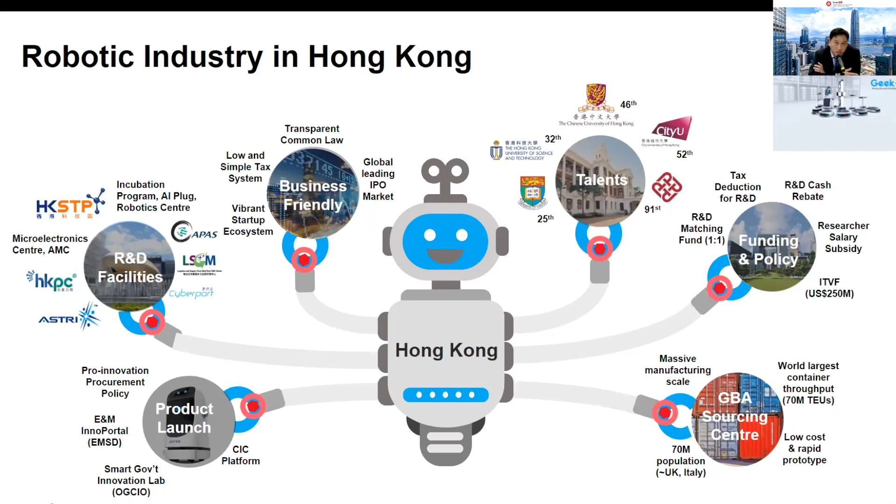We also have a massive number of factories in the GBA area. That's why many companies use Hong Kong as a base and do their manufacturing in the GBA, because it's very close to Hong Kong. That is the advantage of Hong Kong.

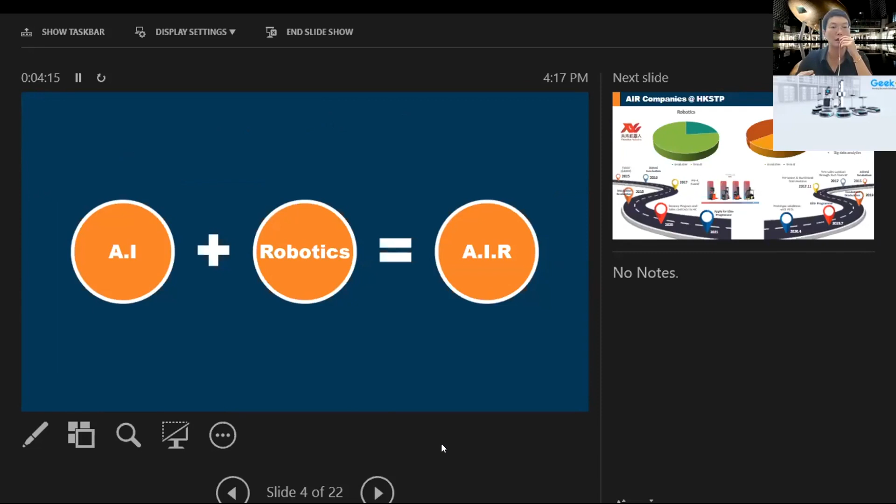So for my own area, which is AIR, an integration of artificial intelligence and robotics - that's why we call it AIR - here is a very quick overview of the existing landscape in Science Park.

In robotics, most of the companies are already in the tenant stage, meaning they are at least SME companies or even bigger. About 20% of them are in the startup stage, so most of them are recruiting or right now in the incubation program.

But for the AI side, you can see another kind of phenomenon. Actually, most of the AI companies right now are still in the startup stage, so they are now in the incubation program, and only a few of them are already more mature and joining the tenancy program. Right now you can see two examples of our successful companies.

The right hand side is a company working on AI, mainly in speech recognition, NLP, and similar areas. They joined the incubation program in 2015, and after two years they got their first sales contract with the support of Science Park. Later on, they got a very good investor, Horizon, offering them pre-Series A investment, and this company graduated in 2018.

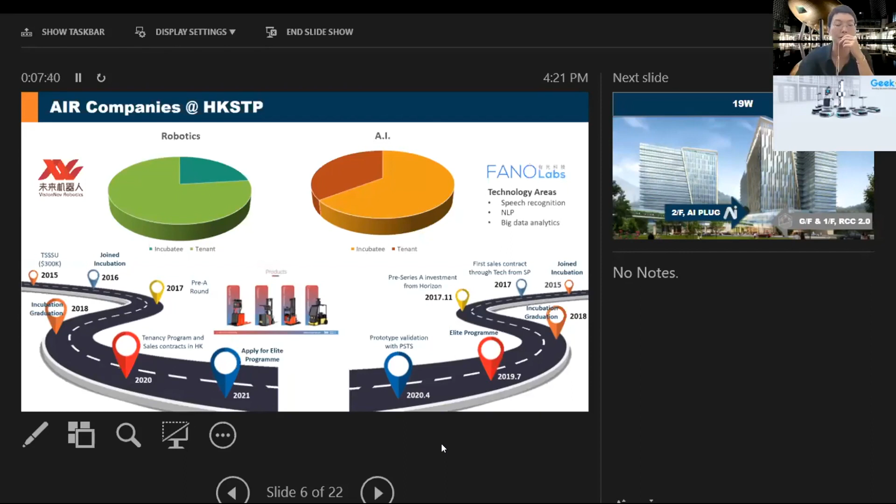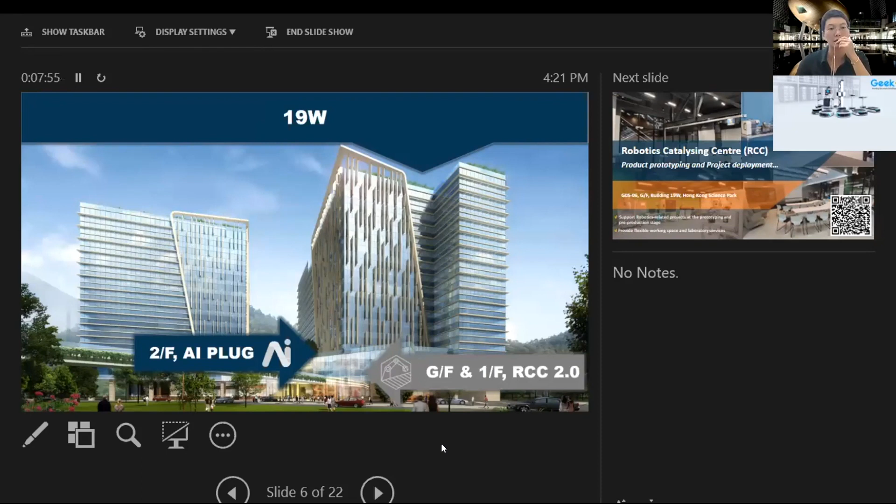Talking about the facilities supporting AI and robotics development, we have two physical centers already set up. One is for AI, which we call the AI Plug, and the other is the RCC, the full name being the Robotics Catalyzing Center.

The RCC offers two critical components for robotics companies. The first is the prototyping service, and the second is the space. This is not just a common office space—it's actually a lab space that allows people to set up robotic solutions inside.

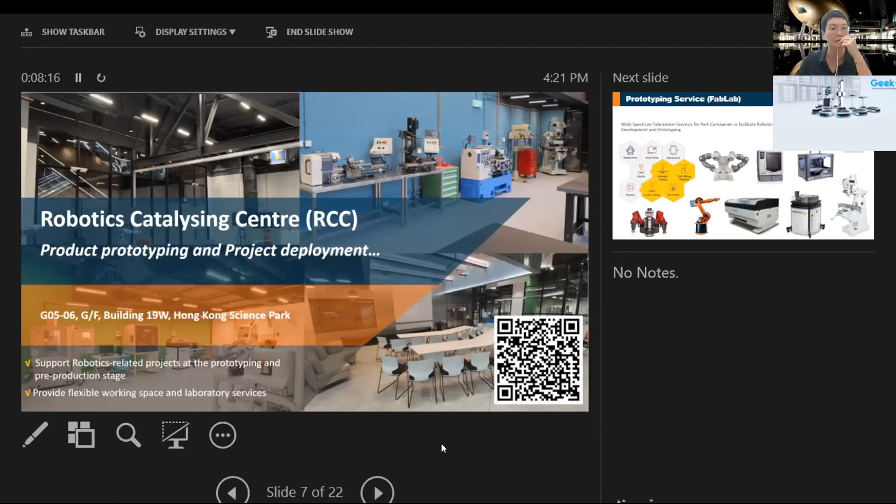For the prototyping service, we hope to offer the most practical support to robotics companies. We have robots on site that you can rent for your own purpose, as well as 3D printing service, laser cutting, and waterjet cutting. All of these are quite practical for companies really working in robotics.

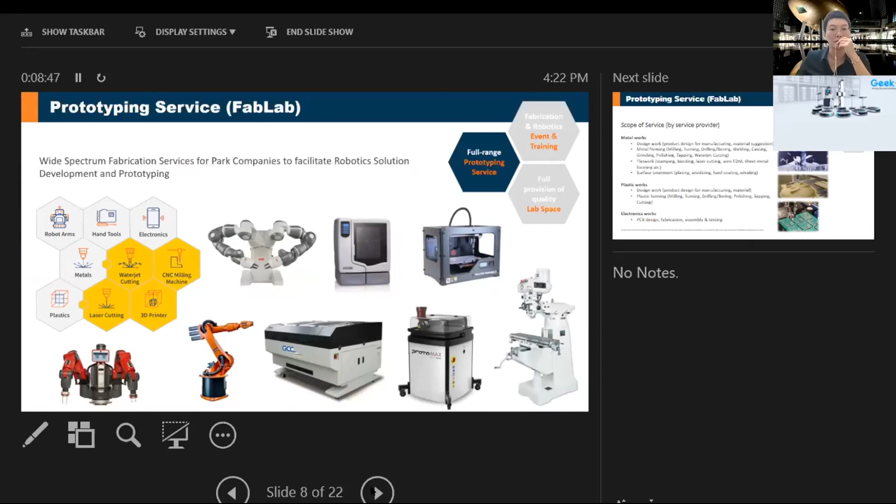For some hardware development, you usually need support from other service providers, so we've offered support for this kind of prototyping service as well. They can help you do metal work, plastic work, and electronic prototyping, so you don't have to worry about all this. Once you're situated at Science Park, even things not really related to hardcore R&D, we offer such services so that you don't have to spend time on it.

Talking about the lab space, all the lab spaces have high flexibility. You don't have to rent the space for years. Even if you just want a space for one project, the shortest rental time is just 1 month, meaning you can set up the whole production line for your client, and when they accept the design and deliverables, you can just move out.

Within the lab space, we already have certain provisions, like high power supply, chemical drainage, and compressors, something like that. So you don't have to worry about the renovation as well.

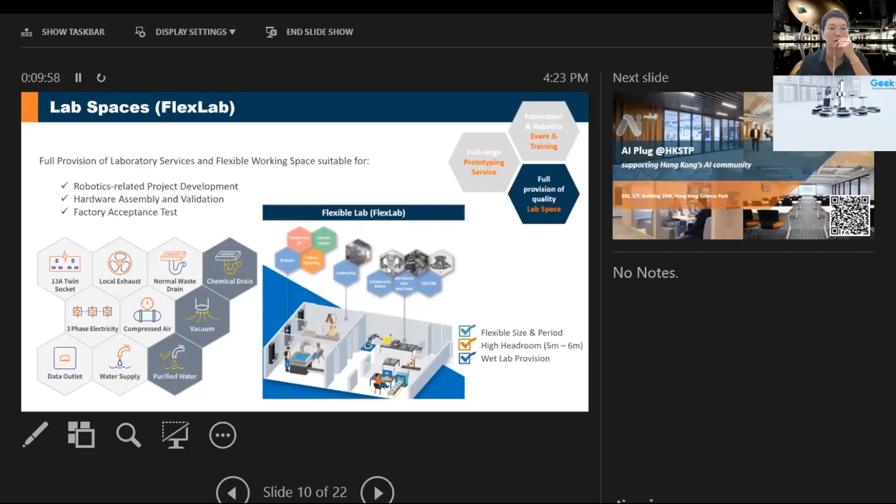The RCC is mainly for robotics, and the second one, AI Plug, is for AI companies. This one operates on a membership mechanism—any company with AI R&D elements can join AI Plug as a member. What we offer is free usage of the AI Plug facilities, like the working cabin and meeting rooms, which are mostly used by AI companies.

Additionally, we have a good deal with several cloud service providers like AWS, Microsoft, Huawei, Alibaba, and Google Cloud. They all have special credit offers for us, the AI Plug members. If you are an AI Plug member together as a Science Park company or incubatee, you may also enjoy the matching fund we offer, which is up to 48,000 per year. Simply speaking, you pay a 3,000 membership fee every year, and then you can seek a 48,000 return when subscribing to the cloud services.

These are benefits for AI Plug members. More practically, if you need technical support from different service providers like cloud service providers or hardware service providers, it's not easy for startup companies. But if you are an AI Plug member, we can help you connect directly with these providers, because they can help with POC stages, offer technical trainings, or even business matching opportunities for our AI Plug members. This is what we call the tech shop.

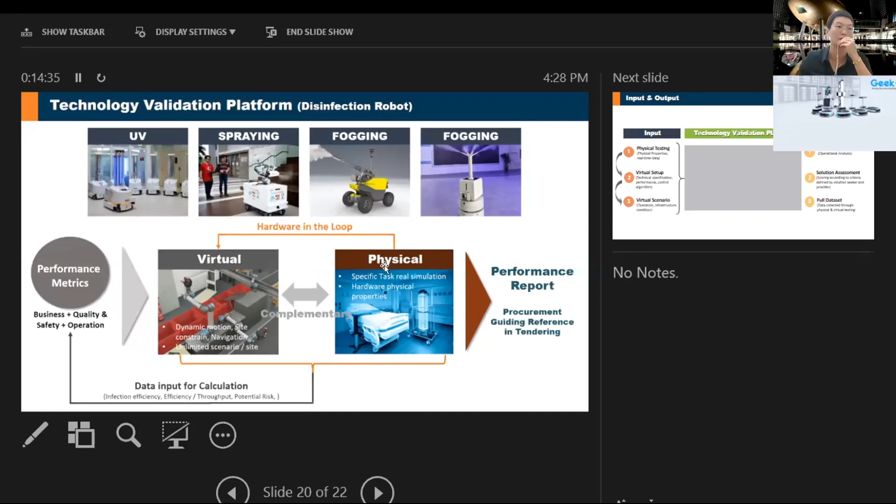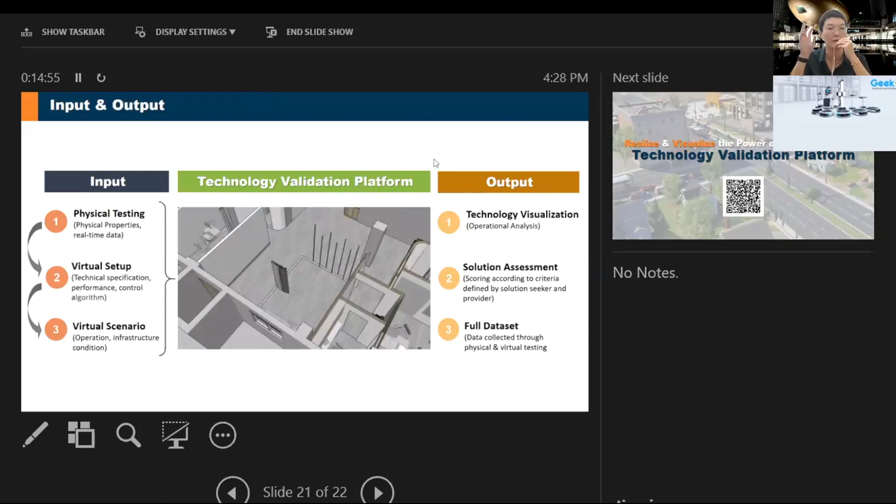We believe that having this Technology Validation Platform will help the solution seeker identify the most suitable solutions they are looking for. Within the platform, there is no limitation for application scenarios, and for you, you may also load some of the assessment for your own solutions.

So this is my presentation today. In conclusion, through the Technology Validation Platform, we hope to help everyone realize and visualize the power of technologies. If you have any further questions, you can scan the QR code, and this is my contact. Thanks a lot.

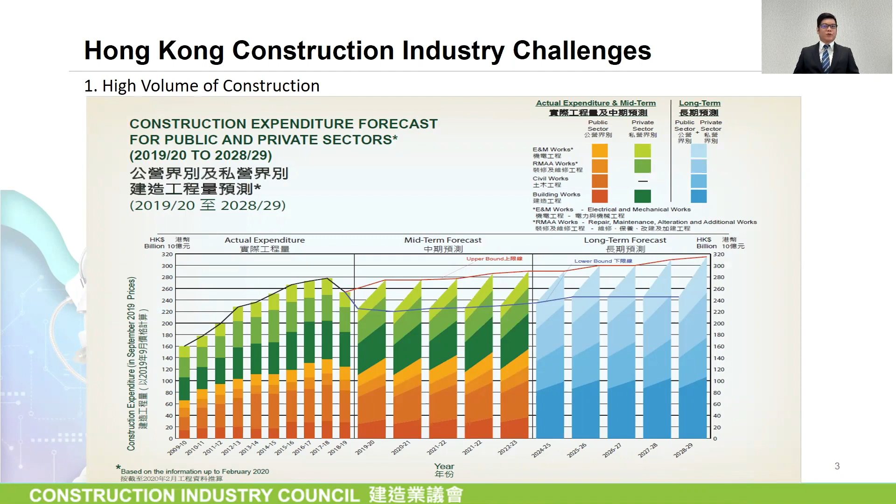According to the 2020 International Construction Cost published by the consultancy firm Arcadis, Hong Kong still ranks very high in construction costs, just behind London and New York.

For the safety concerns, although both accident and fatality rates are showing a downtrend, there are still ways to further improve the safety performance of the industry. For example, application of construction robots for some high-risk tasks can definitely make the works safer and hopefully further lower the accident and fatality rate.

According to our worker registration records, the average age of our workforce is nearly 50, and over 53% of our skilled workers are aged 50 or above. This figure is indeed very alarming and is affecting our productivity.

In view of the above, the Development Bureau of Hong Kong SAR government has led the industry to implement Construction 2.0 for promoting its sustainable development by advocating innovation, professionalism, and revitalization. The development of an industry culture that embraces change, innovation, and new technologies to drive forward productivity, efficiency, and enhance project delivery outcomes. We need more construction robots to help achieve this.

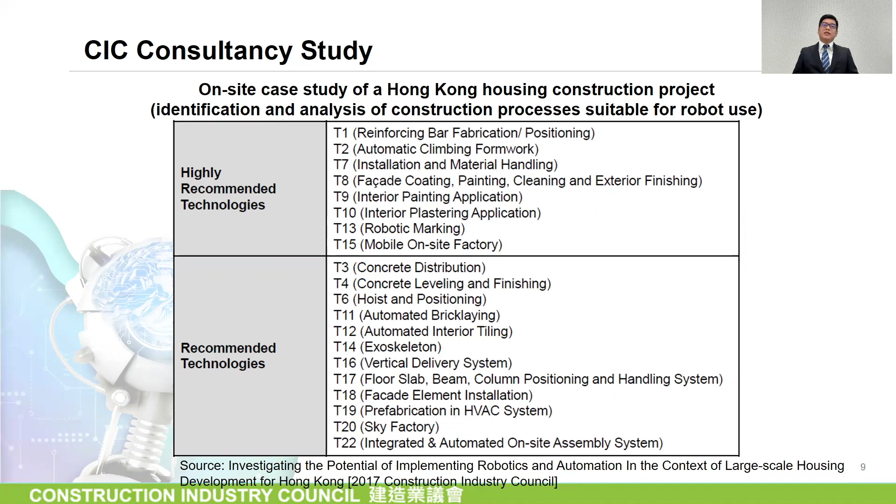In the study, a survey result showed that in Hong Kong, construction robotics and automation are overall approved by the local professionals and stakeholders. The highly recommended technologies are reinforcing bar fabrication, positioning, automatic climbing formwork, installation, and material handling. If you are interested in the report, you can refer to it on our CIC website.

Now I will show some robotics applications in Hong Kong. The service robot is a custom-built robot system for repairing gas service pipes at the external wall. It's equipped with cameras and different advanced sensors, such that the user can monitor and remotely control the robot at the ground station. It improves work quality and safety.

Adaptive robotic welder also reforms the traditional way of welding. With its adaptive robot control, the robot can be set up within 2 to 5 minutes. The operator can easily perform the welding function in a safer manner. The robot can also work with BIM, big data, and 5G technologies, bringing added value to the construction works.

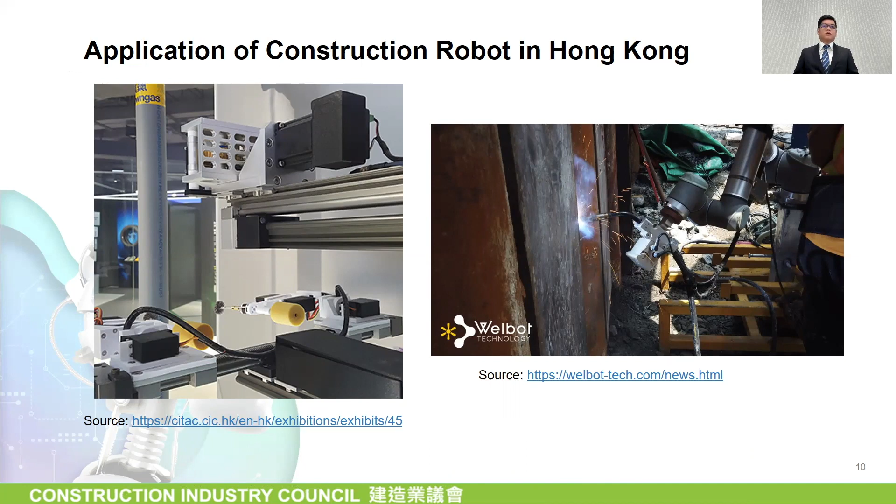The intelligent robotic system was initiated by the Highways Department and successfully built by the Highways Department and the Hong Kong Productivity Council. The system possesses full cognitive abilities to understand its surroundings and uses automated robot arms to place and collect traffic cones on public roads. It enhances safety protection for carrying out road works on public roads.

The drilling robots drill holes at the ceiling automatically. Under the control of just one worker, the worker has to enter the perimeter of the workplace via a BIM model, set the first drilling hole, and the robot can do the rest. Compared with the traditional drilling method, the robot saves about 70% of the time needed for a job and improves safety by eliminating the need to work at heights.

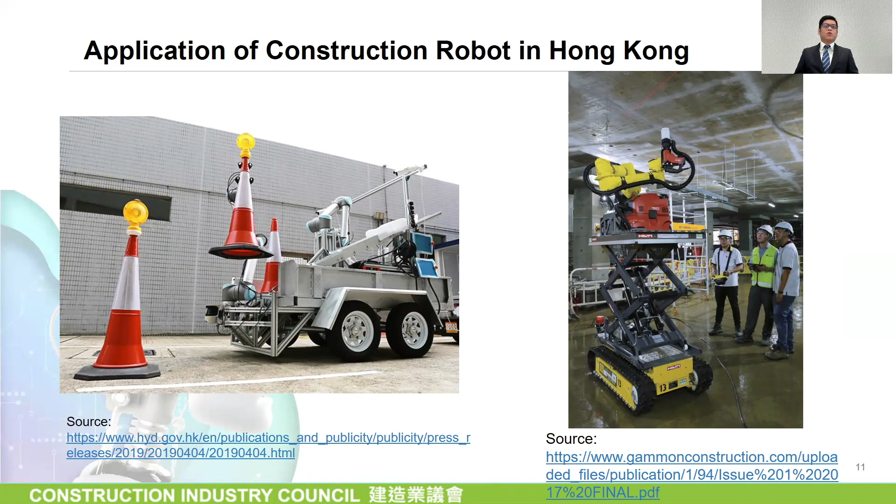The CIC believes research and innovations are of great importance to the sustainable development of the construction industry. Hence, CIC is committed to working closely with industry stakeholders to drive innovation and initiate practical research outcomes.

The CIC Research and Technology Development Fund is set up to provide financial support for research projects which can benefit the construction industry through practical application of the research outcome. Construction robots are one of the research agendas we are looking for. We hope to support researchers and innovators to develop construction robots and conduct trials.

European companies can apply for our R&D fund via subsidiaries established in Hong Kong or by working with partners in Hong Kong. Besides the R&D fund, there is another technology fund called CITF, more focused on product implementation to encourage wider adoption of innovative construction methods and new technologies.

I introduce Raymond from our CITF team to brief you on the fund. Raymond, please.

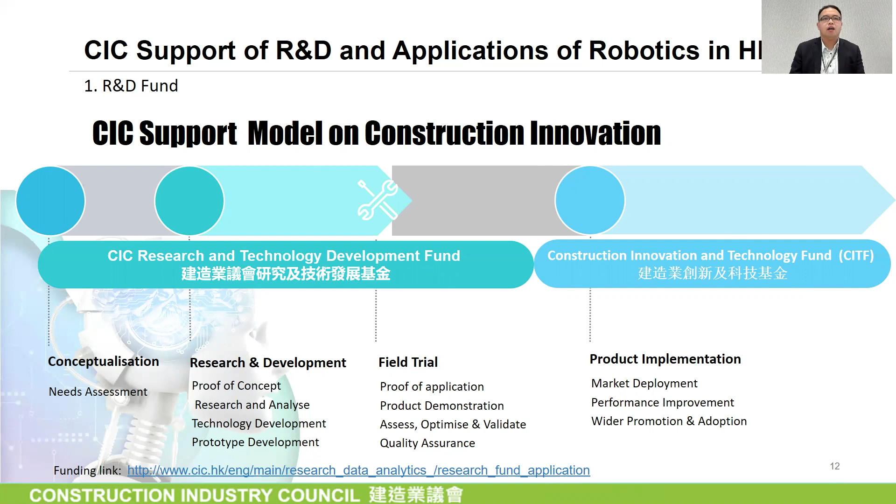My name is Raymond, representative of the CITF Secretariat. The CITF has an approved allocation of 1 billion Hong Kong dollars. It was established by the government of HKSAR in October 2018, with CIC as the implementation partner. The CITF encourages technology adoption in automation, industrialization, and digitization. We have two categories: the technology adoption stream and the manpower development stream.

We will elaborate more on the advanced construction technologies (ACT) and industrialized process under the technology adoption stream today. There are mainly three types of enterprises eligible to apply for the CITF: levy-paying contractors, registered specialist trade contractors and registered subcontractors, and consultants on the list maintained by the government and professional bodies.

We have two modes of funding under the ACT. The first is co-funding with 70% grant from the CITF, and the second is co-funding with 50% grant from CITF for rental of equipment. The funding ceiling is 800,000 Hong Kong dollars per technology. Within this ceiling, the ceiling for rental is 200,000 Hong Kong dollars per technology, and the rental period is no more than 6 months. The cumulative ceiling for rental is 500,000 Hong Kong dollars per applicant or company.

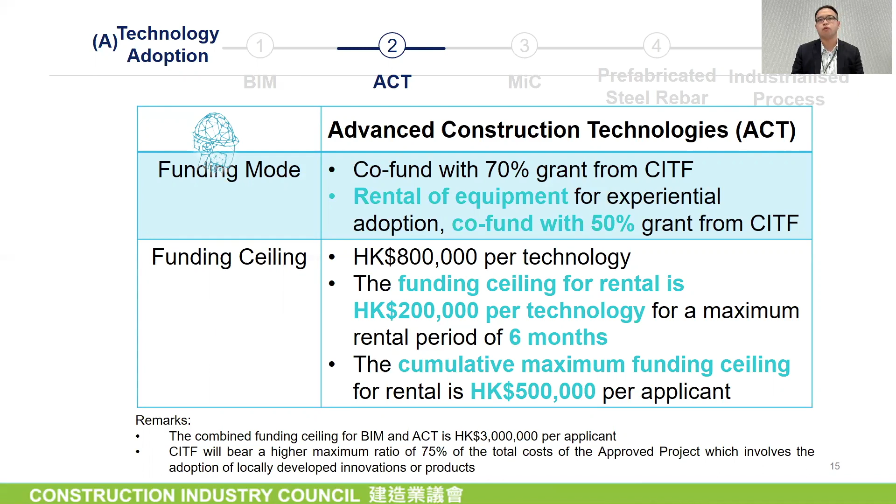Some applicants ask how they could locate a robotic technology that might suit their projects. You could either look for those technologies via your own service providers, or browse the pre-approved technology list on the CITF website. Those technologies listed in our pre-approved list were technically approved by the CITF vetting committees. If you are eligible to apply for CITF and choose an item from our pre-approved list, we could notify you of the application result within 30 calendar days upon receiving complete information.

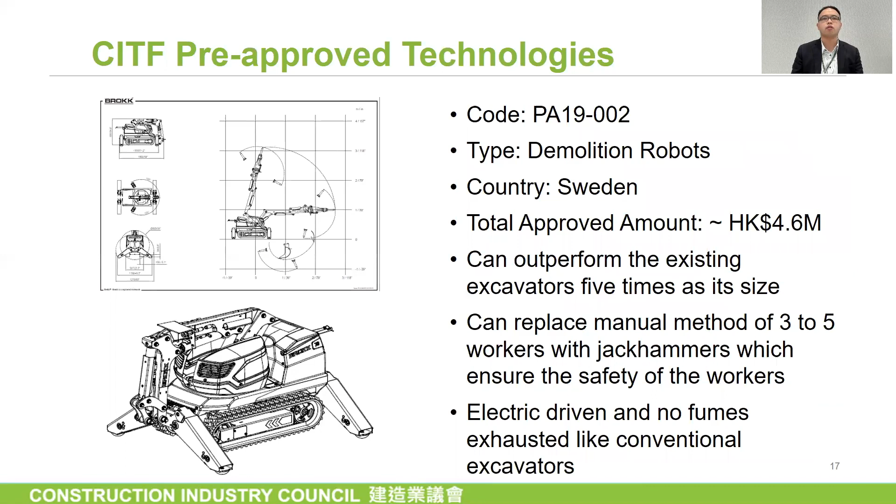Taking one of the pre-approved robotic technologies as an example, we have so far approved around 4.6 million Hong Kong dollars to eligible applicants adopting this technology in their construction projects in Hong Kong. We also provide funding support to industrialized process robotic welding. The funding ceiling is 800,000 Hong Kong dollars per applicant, and the mode is co-funded with a 15% grant from the processing fee involved.

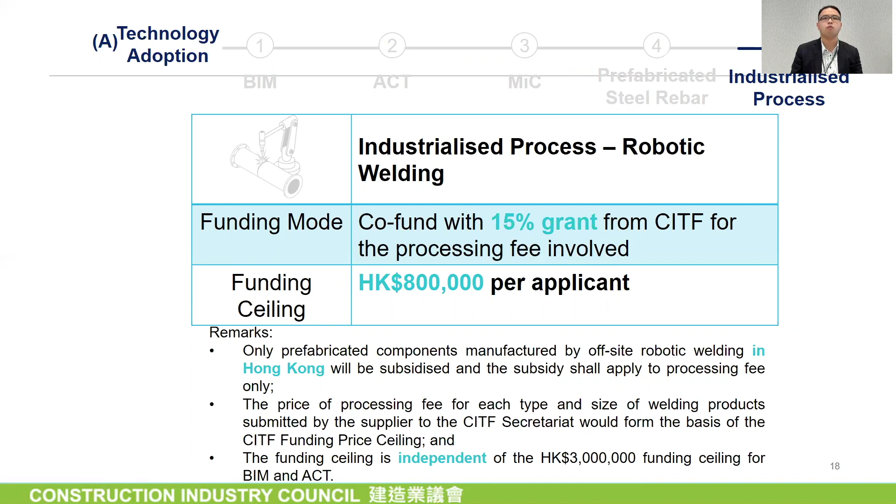The application process of CITF is mainly via the CITF application e-portal. Therefore, you have to create an account at the CITF website if you would like to apply for CITF. It would normally take us 60 calendar days to process non-pre-approved applications, and 30 calendar days for pre-approved applications. Thank you for your kind attention, that's the end of my section. I will pass it back to Terry.

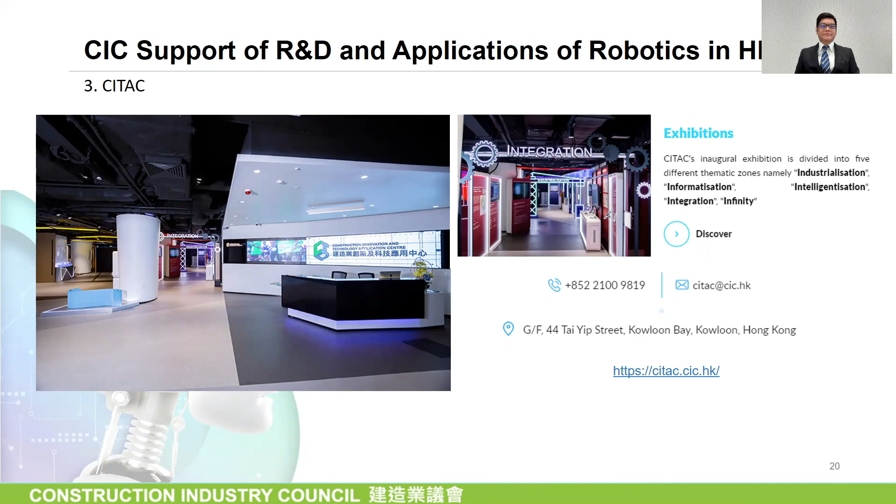Last but not least, we are developing a construction robot certification scheme applicable to all construction trades, with specific requirements for 3 key trades: welding, painting, and plastering. The objectives are to stimulate and elevate confidence in the use of construction robotics, and thus stimulate demand and supply of robots for the Hong Kong construction industry, to benchmark the performance and reliability of construction robots used on construction sites, and to uphold industry-wide standards in terms of functionality, productivity, quality, safety, and sustainability.

We have commissioned a consultant to carry out a study for establishing this scheme for us. The scheme is expected to launch in the second quarter of 2021. That's all for my presentation today. Thank you very much.

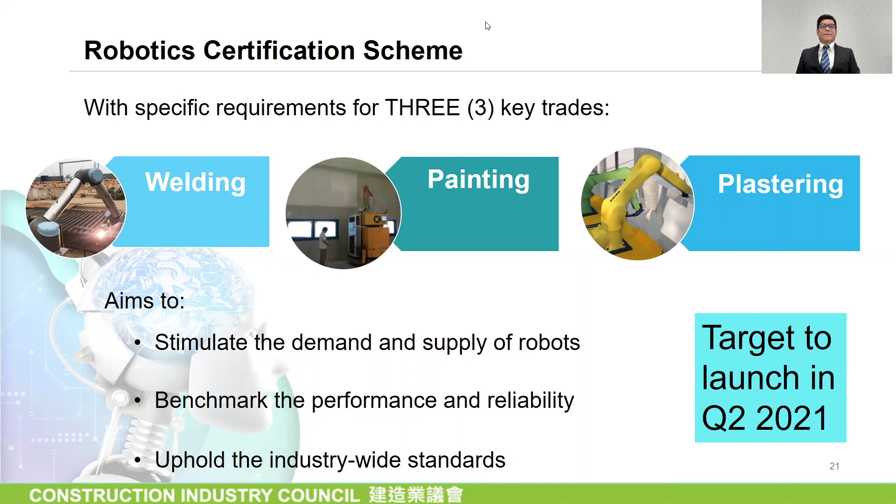So someone want to talk, continue to talk. Hello, Jonathan. I can see you over there with your robotics sitting next to you. So I do, it's doing a massage for you, right? So I hand over to you. Thank you, Jonathan. Perfect, thank you.

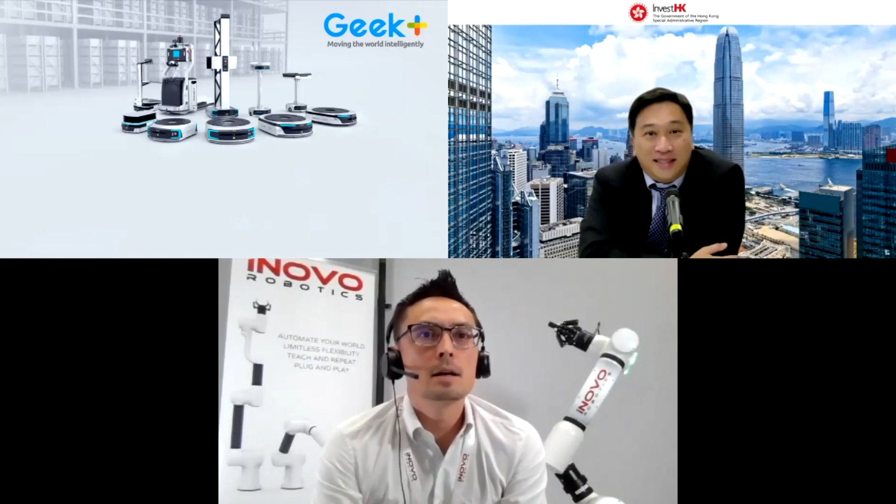Let me just prepare my slides. Great, firstly welcome everybody, and thank you very much Andy and the team at Invest Hong Kong for the warm invitation and introductions. My name is Jonathan Chung, as Andy said, and I am the co-founder of Inovo Robotics. And as you can see, I've brought a robot with me today.

We started Inovo Robotics in 2016. We are a collaborative robot manufacturer, and we specialize in making not only industrial robots, but collaborative robots for small to medium businesses, for batch manufacturing companies, but also a number of different verticals, such as agritech, food and beverage, batch and small scale manufacturing, as well as the education market. So a number of different verticals, and what we do is we have a unique set of selling points which allows us to enter those markets and be successful with those features, which I'll go on to in a moment.

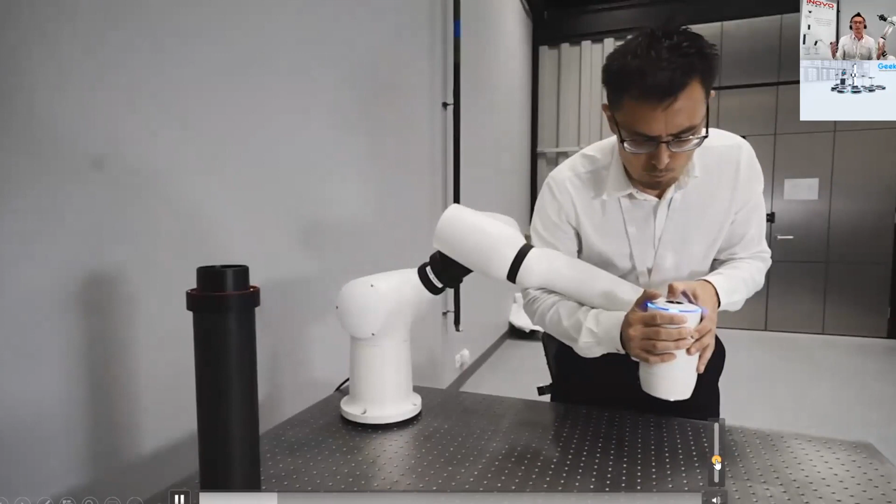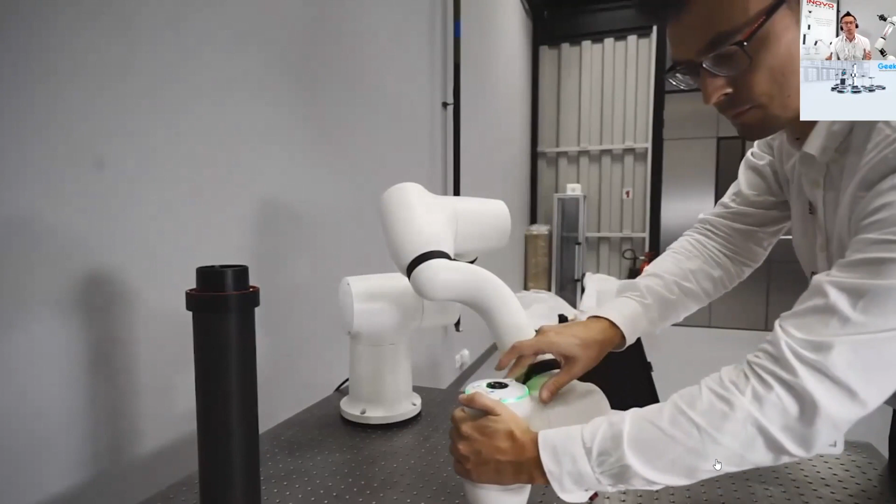So what we have is a really portable, flexible robotic system. This is a plug and play, modular, easy to program, highly flexible robotic platform. What this platform does, as this video is showing, is offer a really easy way to configure, use, and program, and quickly automate your everyday needs in a safe way.

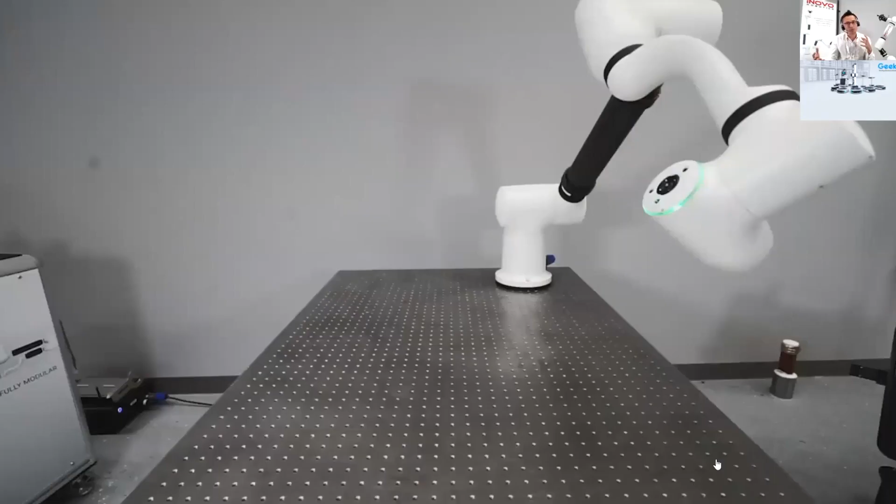And so what I'm doing now is I change the length of the robot. Suddenly you go from a very small, high payload robot, which is working in a very confined space and is easy to program, to a very long reach robot for hard to reach areas, for moving items at greater distance. That highlights loosely what our first real target unique selling point is.

So what you see here is 3 robots, but actually this is all one robot. We create a 3-in-1 robot solution. This enables our users and customers to not have to worry about picking the right length or the right payload, or worry about getting it wrong and having that robot only do one thing for its entire life, and then afterwards be inflexible to change its application in the future.

And secondly, what we are really aiming to do is make really easy to use robots. We bring a different level of flexibility and ease of use that you really don't see elsewhere in the market. And thirdly is our price point. We aim to democratize robots, meaning to enable as many people to have access to automation, not just the big companies who have the budgets for large robots - they don't necessarily need to be the only ones who benefit from automation.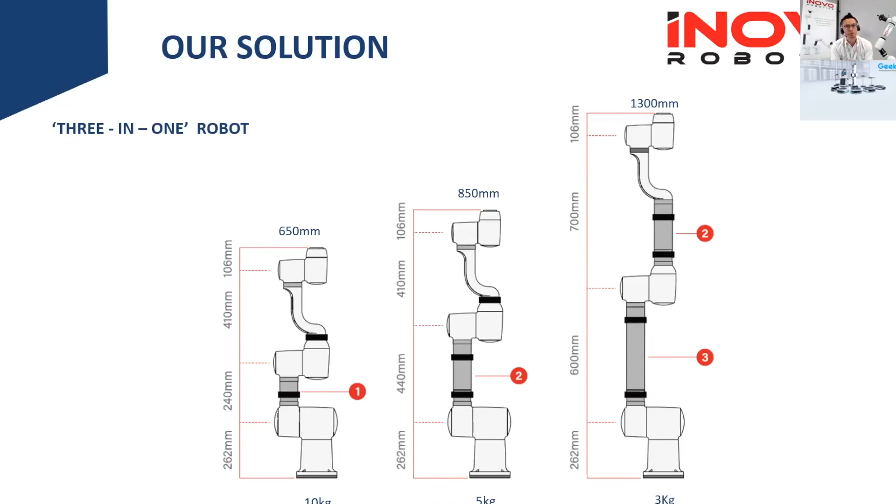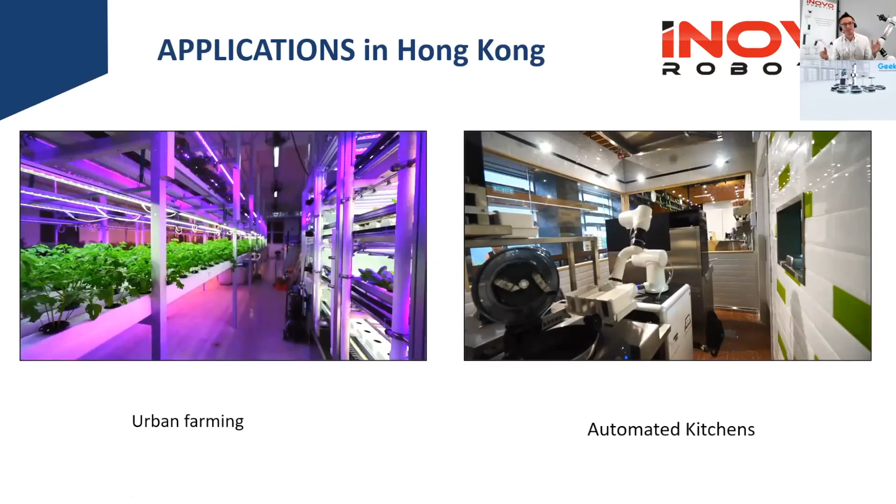So here are some applications that we have going on in Hong Kong. On the right-hand side, we have our robot in one of the verticals I mentioned earlier - this is in a smart restaurant, where we move raw ingredients into the cooking area. This is very good for them because it enables them to take the person outside of the kitchen. The kitchen, or the person, is the biggest cause of contamination, virus, dirt, health and hygiene risks inside the cooking area.

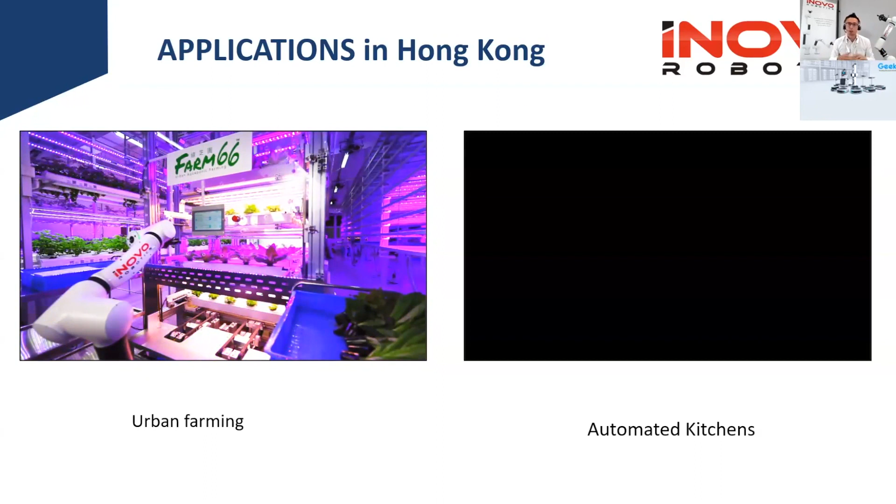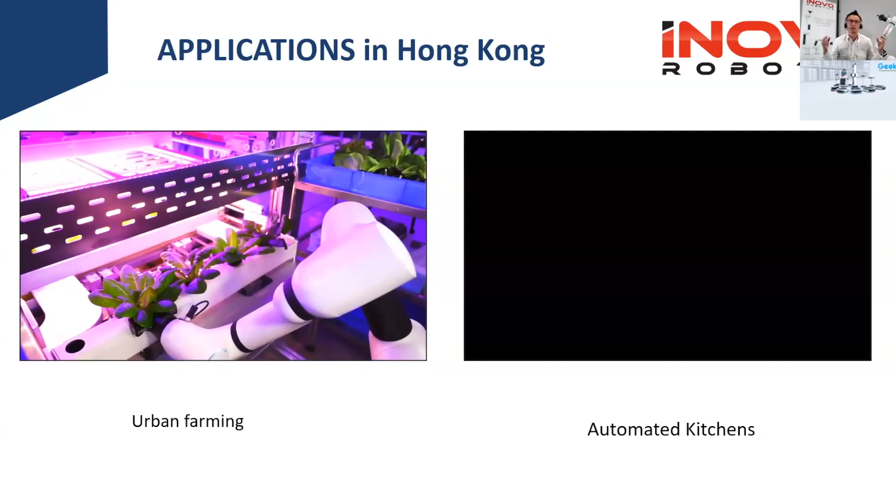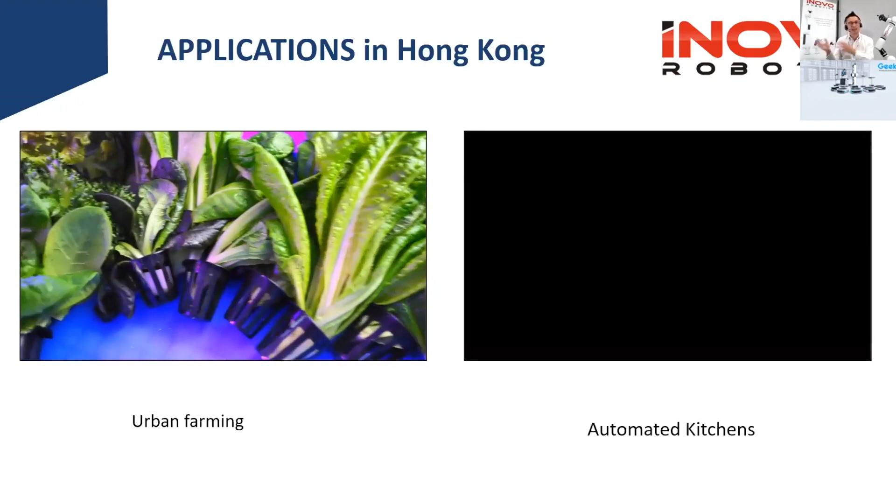And on the left-hand side is a collaboration we're having with Farm 66, another Hong Kong startup within the Hong Kong Science Park ecosystem. They are experts in vertical farming - indoor farming in a super hygienic, clean way. We help accelerate their activity by simply bringing in our automation systems and automating equipment. So that's one of the areas.

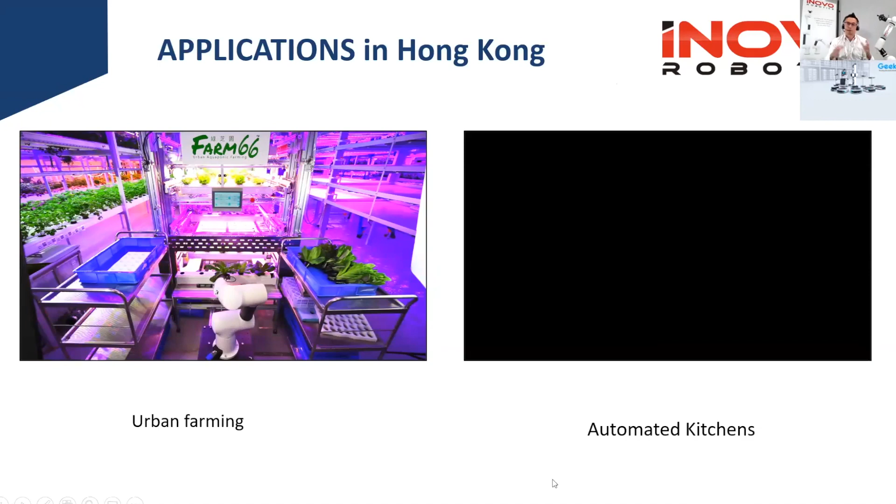So again, it's a similar theme with removing people away from food products to increase the level of health and hygiene and decrease the level of contaminant. This is an area that we're really excited about because it's a real fun area.

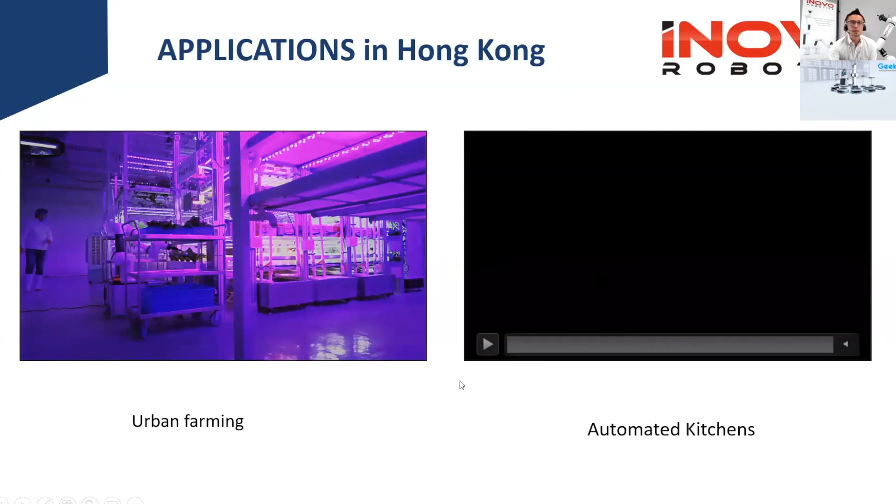Going on to some other applications we're working with within Hong Kong and different areas - as I mentioned, food and beverage, urban farming, also lots of assembly work with companies whose head offices are in Hong Kong but their factories are in the Greater Bay Area. As labor rates are increasing, they're looking to increase fast and flexible automation, and also lots of different areas within spray painting, testing, and edutech.

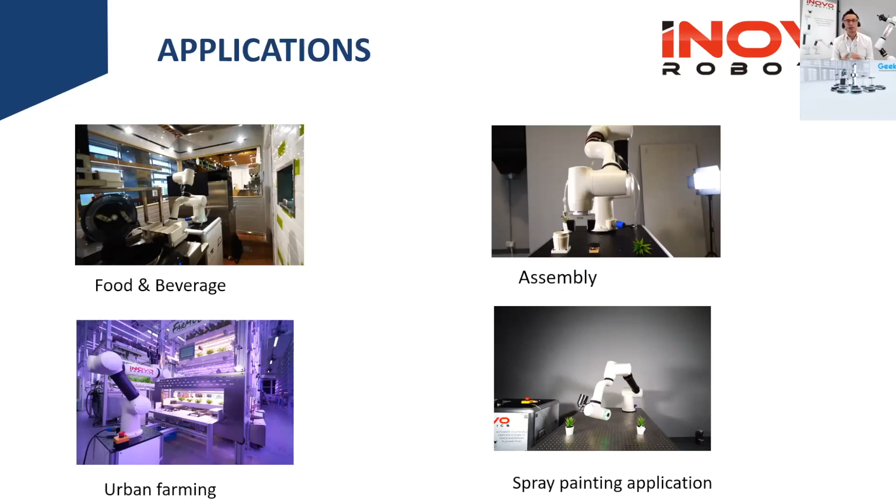But really, just to touch on what we feel is the future of automation and the reindustrialization of big cities such as Hong Kong - in robotics, we have Industry 4.0, which people often use and understand well, and that image of what Industry 4.0 is: smart factories, peopleless factories.

And what we found in the last 6 months with COVID-19 is an increase in social distancing within the workplace, reducing the level of contamination. There's been a huge increase in the need for automation, AI, and robotics, and reducing the risk that businesses have if a pandemic happens in the future - can their businesses continue to operate, what tools allow partial operation, and all those kinds of things have meant that this vision of smart connected machinery is getting closer and closer. That's meant that the market in Hong Kong and the Greater Bay Area, as GDP increases and minimum wage levels increase, is becoming a much more important factor.

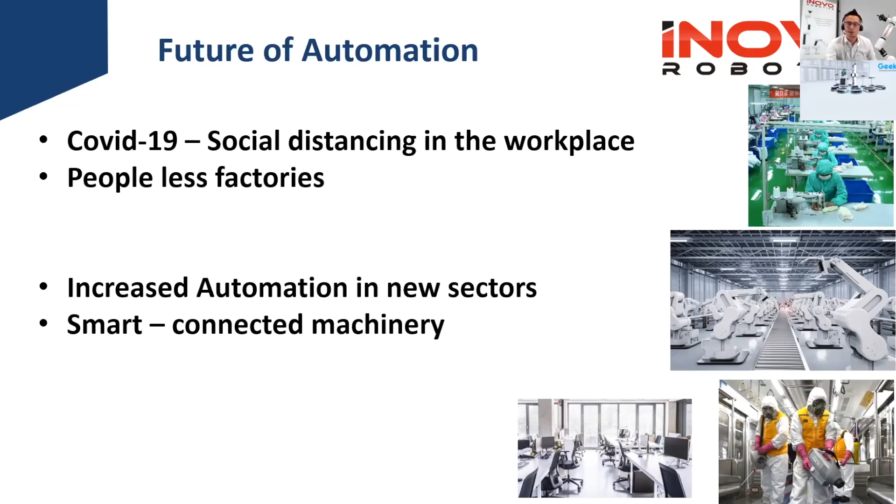So the area for us in Hong Kong, the Greater Bay region, is very positive, and we're very happy with our business growth as it is. And that really brings to the end my presentation.

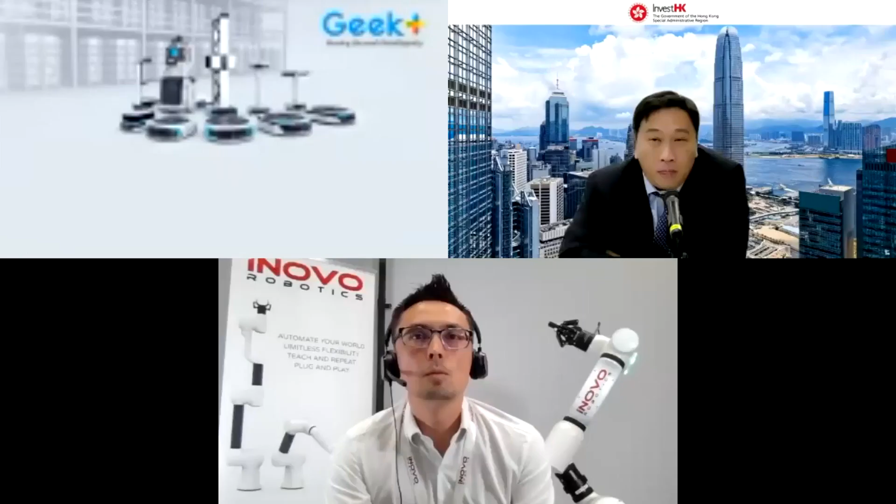Thank you very much, Jonathan, very interesting video and talk. There's a couple of questions already in the Q&A section for you, so we will leave it at the end of the section. The next speaker is Mr. Fong, who will talk about Geek+ and how to use Hong Kong to go global. Shall I pass it on to Mr. Fong? Thank you for joining us today. Let me hand over to you. I know you have a very fantastic video prepared for this talk, so I hand over to you. Thank you, Mr. Fong. Okay, all right. Okay, cool. Okay, let me share the screen.

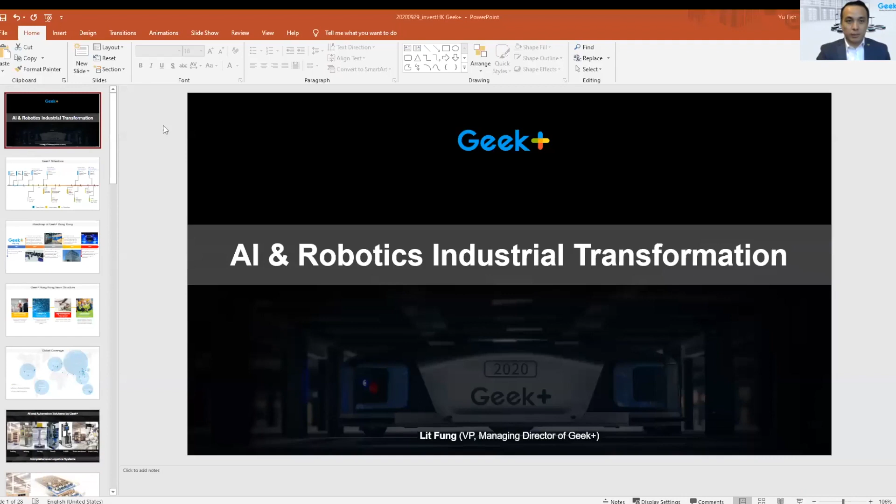Okay, thank you, Andy, and the team of Invest Hong Kong for the time in this webinar. My name is Lit Fung, VP and Managing Director of Geek+. We are in the AI and robotic industry.

Let me introduce our company background. We were founded in 2015 in Beijing, China, and in the first year we got a 10 million RMB angel round funding, which supported our growth and R&D product. We kept getting different series of funding. Last year we closed our C1 series funding with $200 million US, which is very good funding for us and also the biggest value in our industry. We broke the record already, and this year we also have another new round coming. Probably we will close another round within this year.

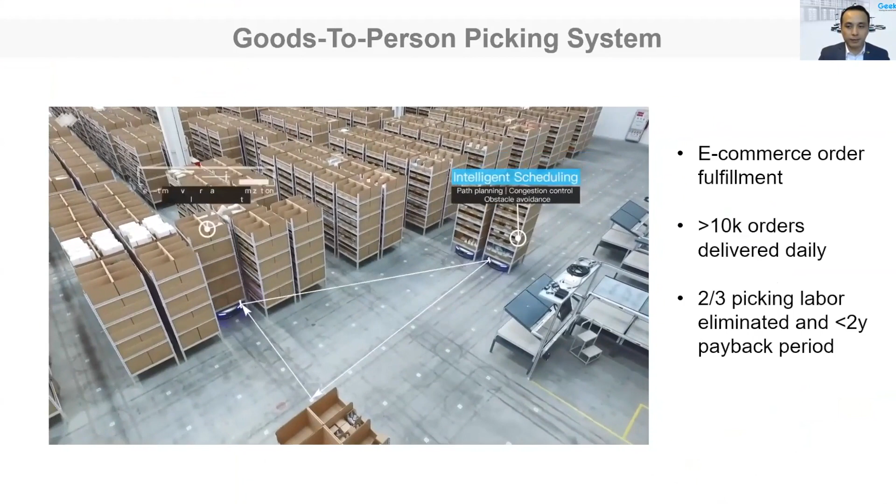You can see this is a kind of robot that goes under the shelf and then brings the shelf to the operator to do the picking. This is a quite familiar system, we call it picking system. And this is the robot we sold the most quantity of in the world. The robot can help the operators with labor saving, up to 60% labor cost saving. So the customer can enjoy a very good return on investment.

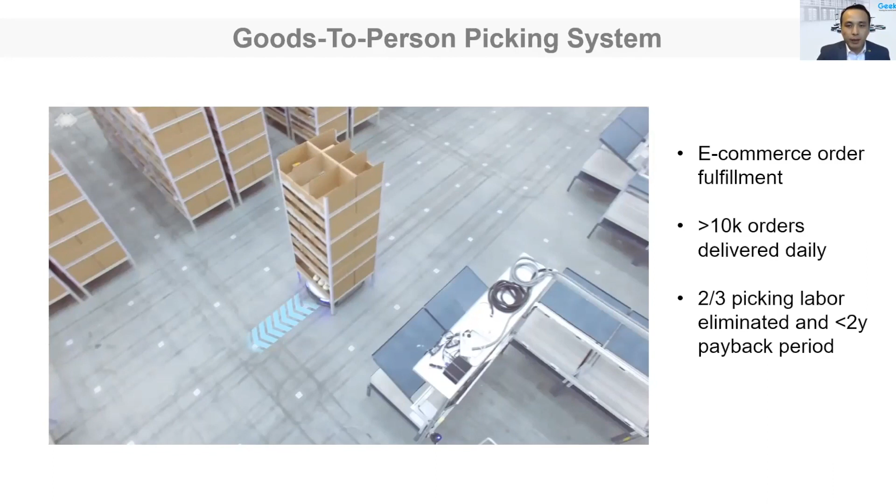And then here's a case where we worked with Decathlon. You know, Decathlon is a very fast growth company, and we're happy to work with them. We grow together with Decathlon.

We've already deployed almost 10 sites already, six sites in China and another 4 sites in Europe and also Asia. We will probably have 16 site warehouses globally within this year. And then we also plan to work with them on around 35 sites totally in the world over these 2 years.

So this is one of their case videos, and I think it's very interesting for you guys. So let's have a go.

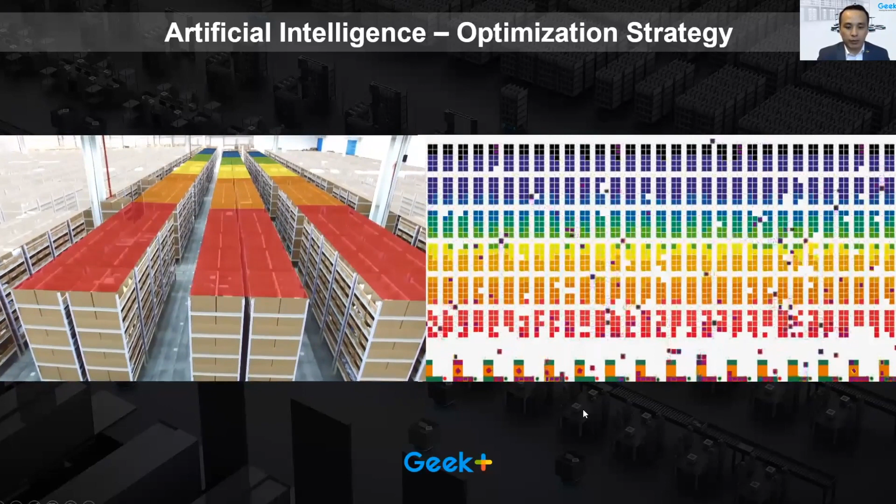And then how we can do the AI - we always claim every product, every service will have AI, but in the robot system it's more easy to understand. We can have some optimization on the solution, you can see there's different colors of the rack or shelf, and we have a heat map to do some scoring so that we can do the shuffling or relocation of all the racks, so that we can keep the most fast moving items closer to the operator, to reduce the traveling distance for the robot as well.

And another type of system that we launched this year, we call it a robot shuttle. This is more applicable for normal shelving with mezzanine floor, or even normal shelving with 5-meter height. The robot can grab the tote to the operator, similar to the previous goods-to-person solution.

And this is one of the videos I can share with you. It's very nice.

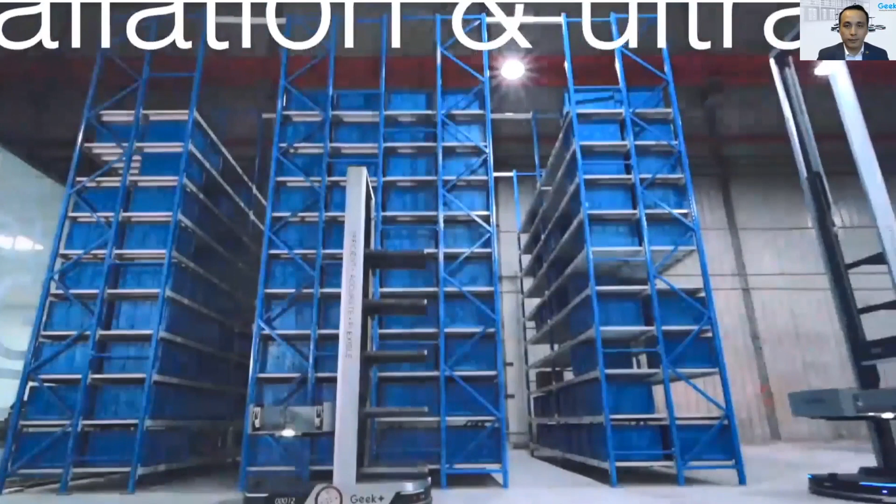I think the most important principle of the robot is no single point of failure, and then you can make use of the robot to utilize your operation.

Another system we have is a new system in the sortation area, the sortation robot sorting system. This is a traditional way that uses the conveyor belt to do sorting, but we are using robots to carry the conveyor belt and carry the tilt tray to do the sorting in different scenarios.

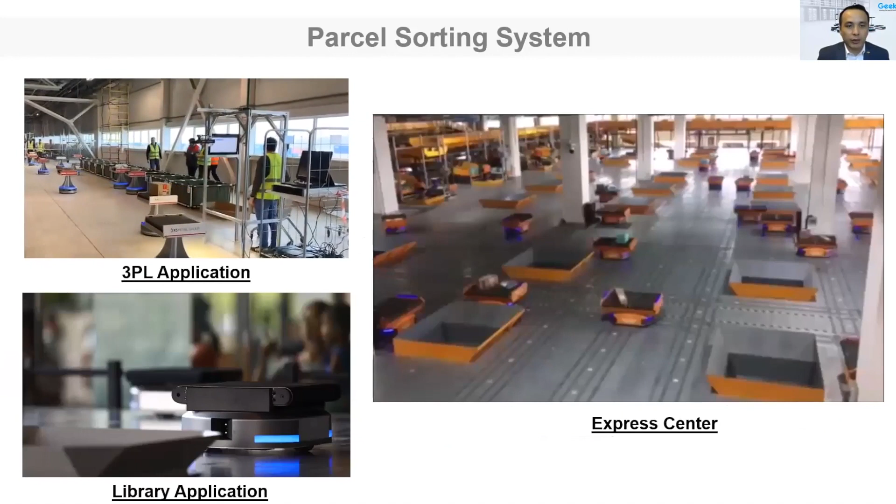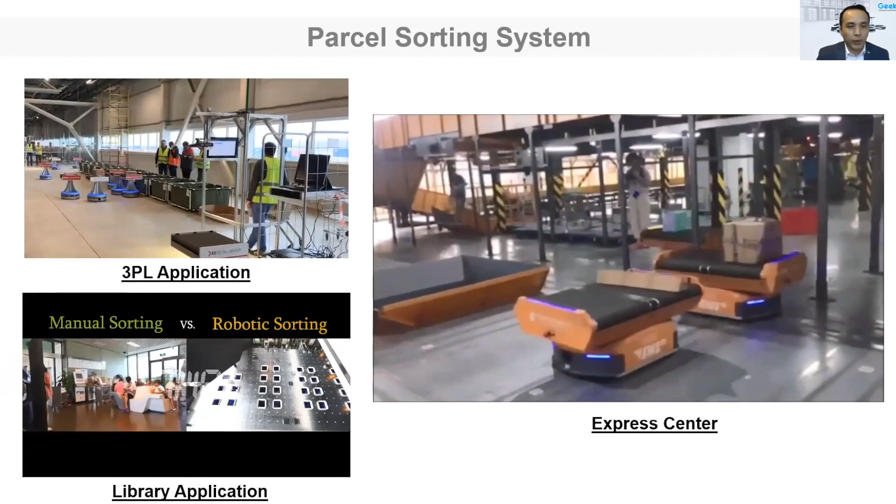We have retail industry and 3PL applications to do sorting by route. We also have a library application where the robot system is located in the library. Once you return the books, you just put it in the induction point, and the robot will sort by different route, so the librarian can easily replenish the books back to the shelf. We also have the express center for parcel sortation.

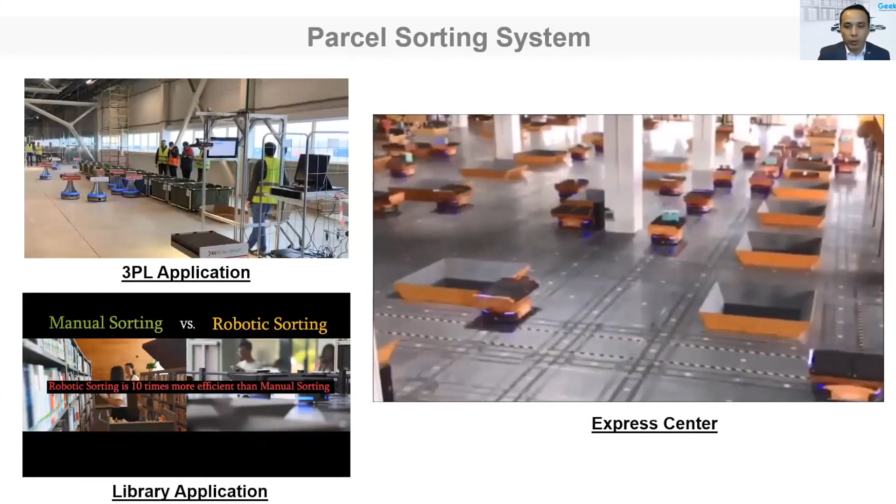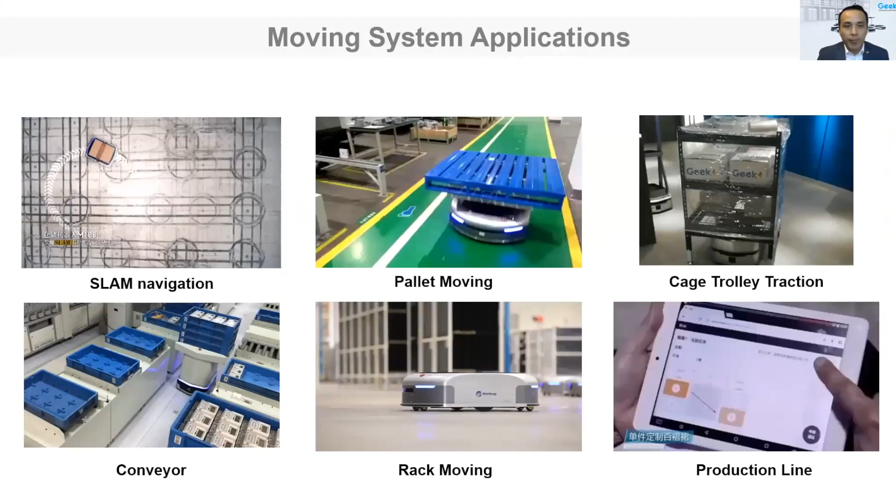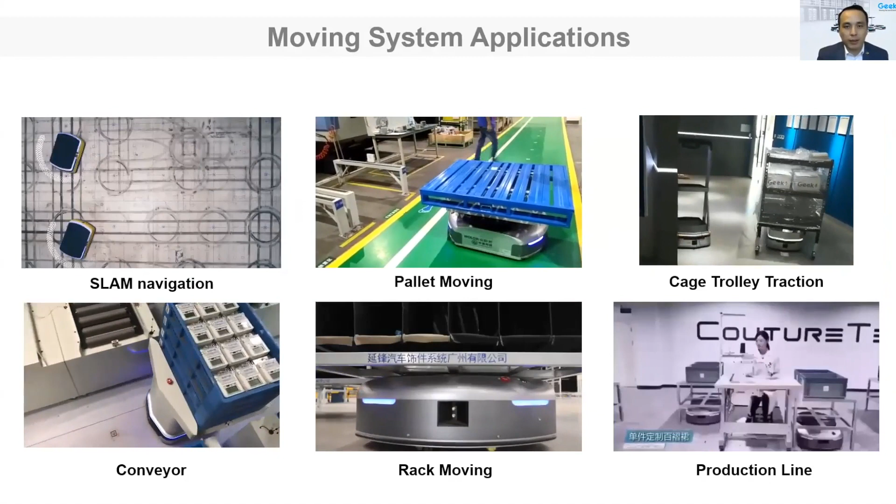We also have the moving system, which is more for the manufacturing industry, using SLAM navigation. This is a very popular technology right now, and we have different applications in industries like automotive, 3C, or semiconductor.

For the conclusion, we believe all of our robot systems get a 1 to 3 year return. This is a very attractive story for ROI within 3 years, and the efficiency we can get is almost 300%, triple compared with manual operation. For implementation, normally it can take around 3 months, but in some countries like Hong Kong or China, we can do it within 1 month.

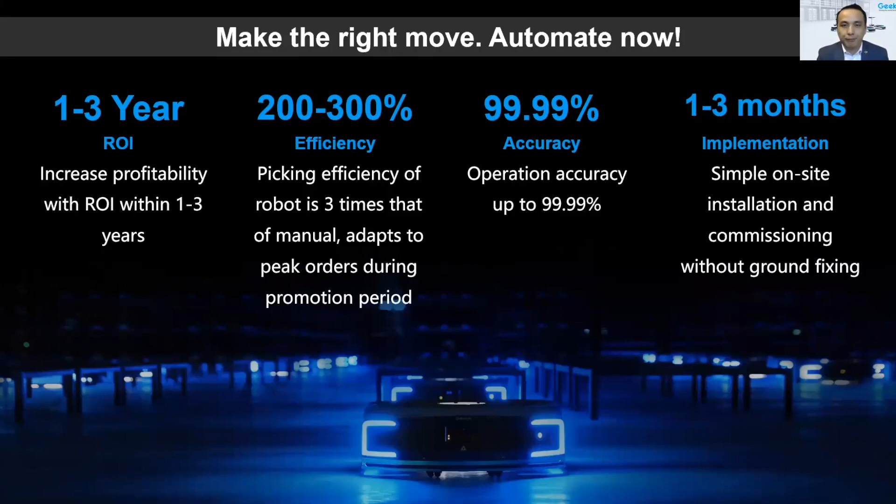This year we wanted to try to do something for public health, so we built the disinfection robot. We hope we can help do something for public health. Let's have a look, for the UVC robotic.

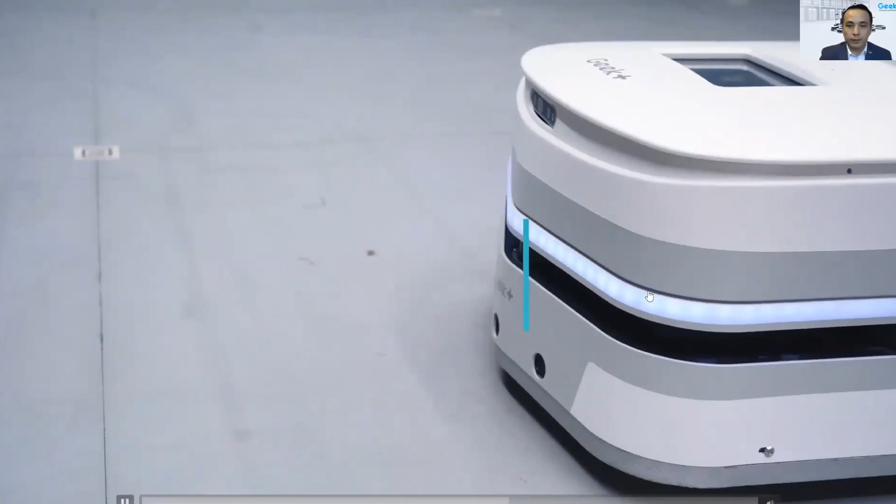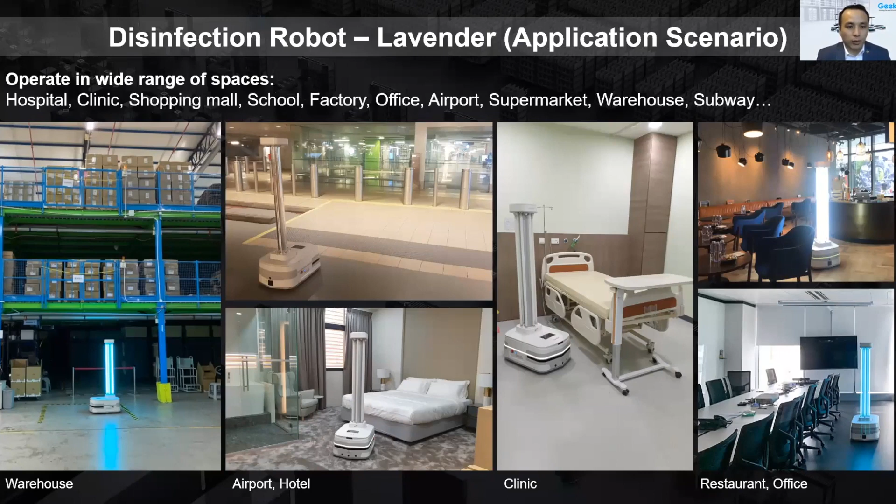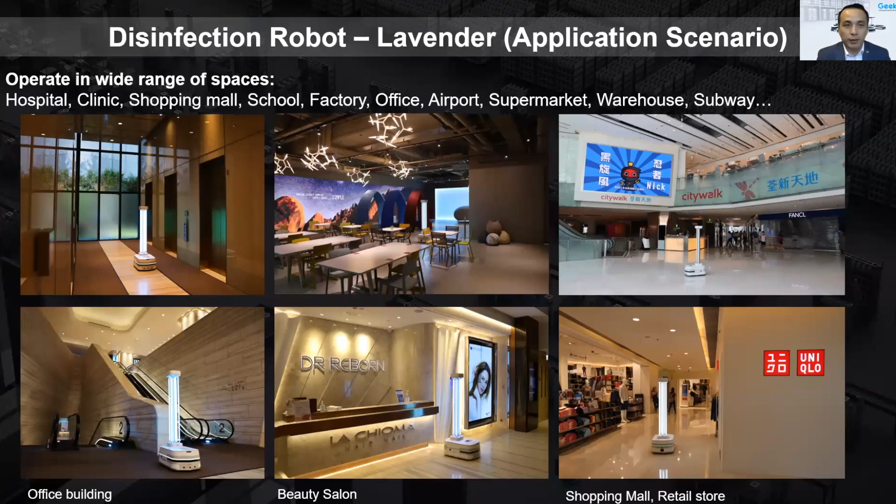There are different applications we did in Hong Kong: warehouses, hotels, some clinics and restaurants, office buildings, shopping malls, and retail stores, to keep things safe with different types of disinfection applications.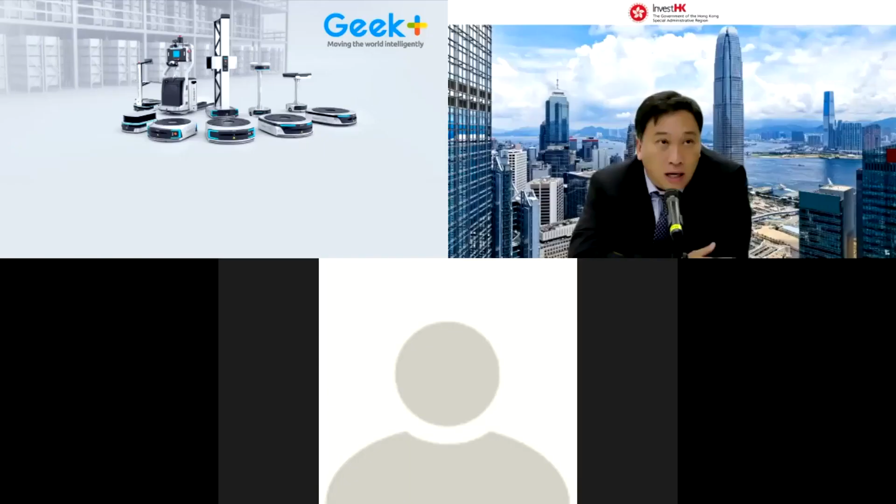So let's move on to the Q&A section. Can I invite other speakers to join this Q&A section? For the audience, I hope that after listening to all the speakers, you can get some sense about Hong Kong. Hong Kong is a place for R&D function because we have the science park, and also CIC, etc., to provide funding and facility. And Jonathan, being a tenant and going through the incubation program, shows how successful it is making use of the science park to change from R&D to commercialization.

And then as well, for Geek+, how can he use Hong Kong as a commercial place to move outside and focus globally and also in Asia, using the talent in Hong Kong and also the business friendliness for doing business in Hong Kong.